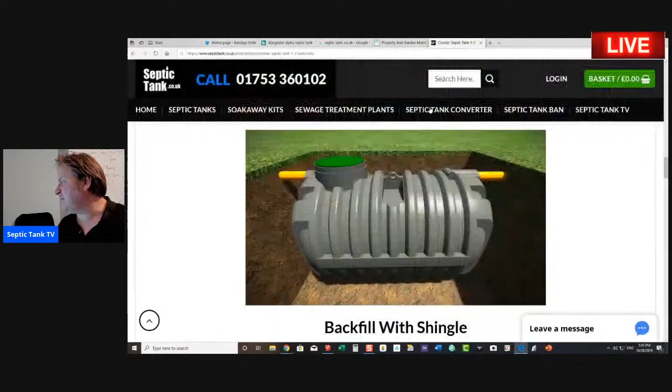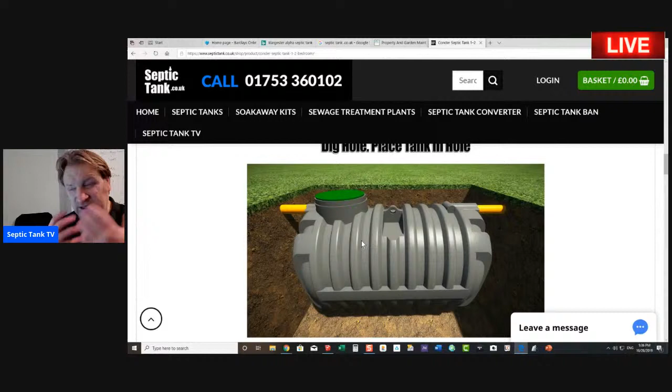Today we're comparing two types of septic tanks: the Klargester onion style or bottle shaped septic tank, and the bullet low profile shape septic tank. We're going to try and work out which is the best, easiest, and cheapest septic tank to install of the two.

Let me get my software up here. I'm going to do a comparison of the two right now. All right, so here we go, if I bring the screen up.

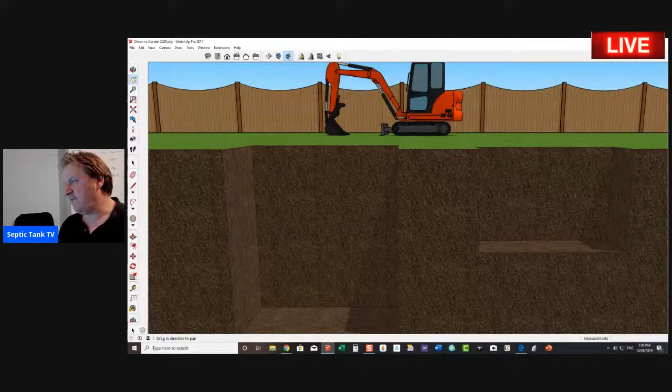What you can see here are two holes. This is a typical garden scenario - we've got a digger, a fence behind, and two holes. Let's put the tanks in their respective holes. In the first hole, we've got the onion Klargester style septic tank, and in the second hole, let's put the bullet shaped septic tank. Those are typically the two types of septic tanks you'll find on the market today.

Let's start with the Klargester style septic tank, starting with cost. Typically it costs about 500 quid to buy a fiberglass onion shaped septic tank. Now it costs about 700 quid to buy a low profile bullet shaped septic tank. So on the surface of things, it seems like with the fiberglass septic tanks, you're getting a good deal.

I mean, look, the pennies make the pounds, don't they? So if you can save a few hundred quid on buying the septic tank, then it's sorted, you've cracked it. No - because you have to take into consideration the total cost of the entire system, the septic tank and the soakaway to install. Or if you're just installing a septic tank, you've got to consider all the bits and bobs needed to install it.

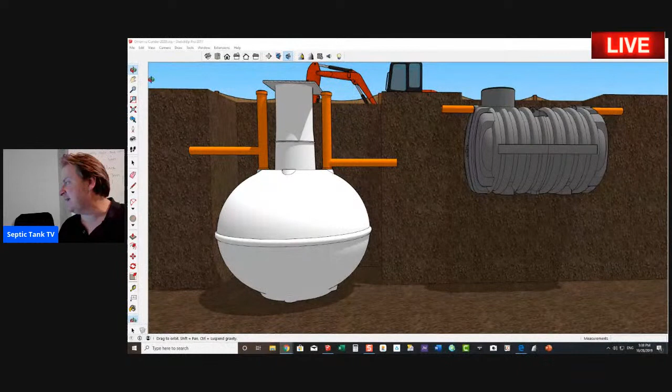So let me give you example number one. You'll notice the onion shaped septic tank's hole is twice the size of the low profile septic tank. So whilst you can get away with a 1.5 ton digger with the low profile bullet shaped septic tanks, you're going to need a minimum of a 3 or 5 ton digger with the onion shaped septic tank. A digger for the low profile tank for the week might cost you about 270 to 300 quid. For the onion shaped septic tank, it's going to cost you 400-500 quid a week - more like 5 or 6, but we'll just say 5. So straight away, the 100 or 200 quid you saved buying the tank has now been lost because you've got to buy a bigger digger.

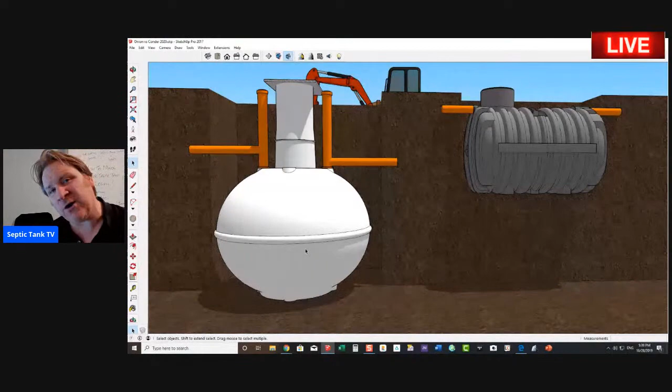So how long does it take to dig the holes for each of the respective septic tanks? Well, to dig the hole for the onion shaped septic tank, you're going down about 11-12 foot, and you're looking at least half a day to dig the hole. Once you start getting past 3 foot and hitting clay or bedrock, you can spend a day or 2 days digging the hole if you're unlucky - I've put in loads of these onion tanks.

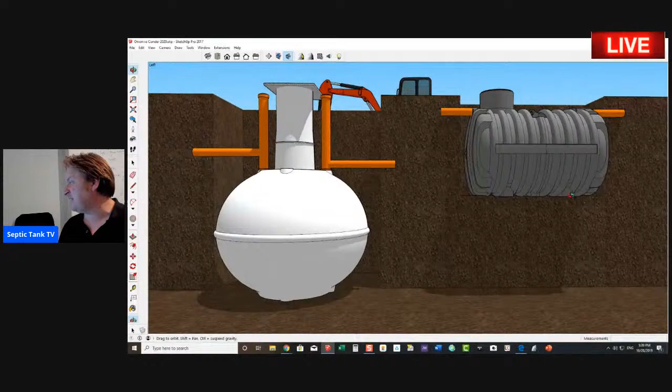With the bullet shaped septic tank, you're looking at about 40 to 50 minutes - an hour at the most, because they're so shallow. You can see the height difference on the two there.

So now, once you've dug the hole, what else do you have to take into consideration regarding the installation materials? Well, with the onion shaped septic tank, you have to concrete them in. But before you can concrete them in, you've got to actually anchor them to the ground - so why?

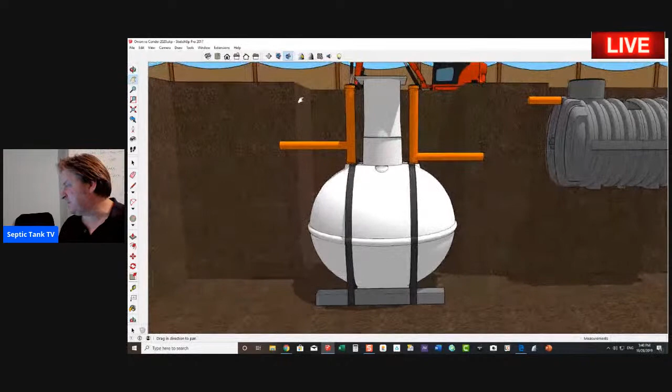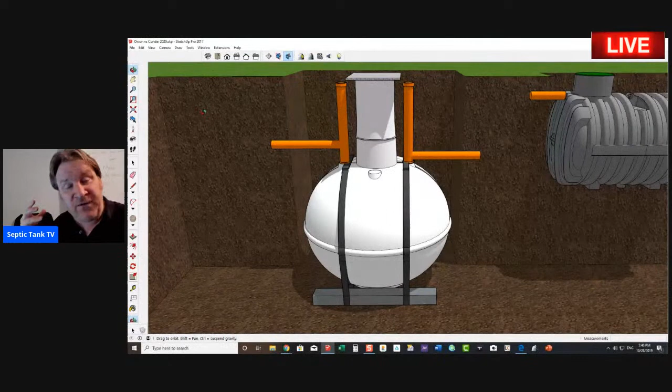Let's say it's taken you a day to dig your hole, and you're now setting it up, getting it ready for the concrete. If it's left overnight and it's not anchored down, many builders over the years have come back and found the onion tank sitting on top of the grass in the morning, because if you've got water retention in the soil, it just pushes the tank right up and it ends up sitting on the ground. So you have to anchor them down.

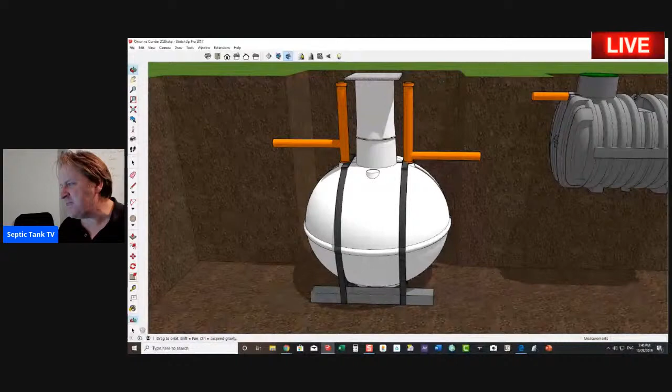You have to also anchor it down ready for the concrete. So the anchor system there is going to cost you about 200-300 quid to get the straps and the concrete lintels. Once you've done that, you've then got to concrete the onion-shaped septic tanks in. Now, if you don't concrete them in, the manufacturers like Klargester will null and void the warranty that comes with the septic tank. You've got to concrete them in, and to concrete them in costs about 600, 700, 800, 900 quid to do.

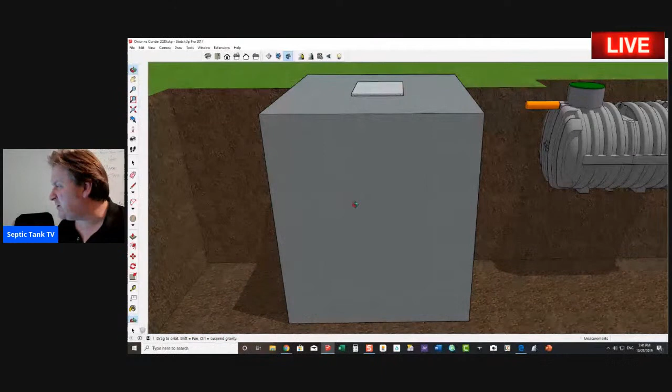So it just gets ludicrous. I've had to concrete loads of tanks in. So let's just break down the costs here. You've bought your onion-shaped septic tank for 500 quid, let's say you got it cheap at the builder's merchants. 500 quid, right?

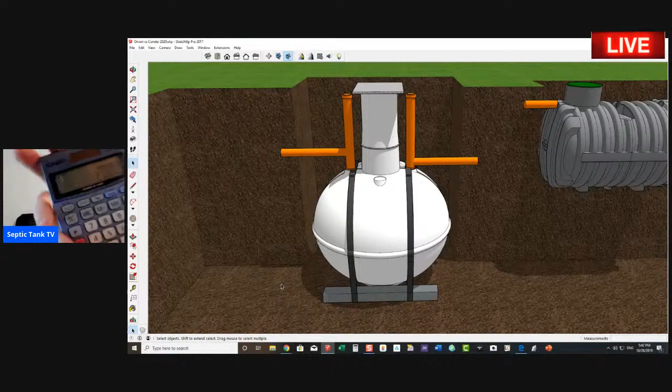Let me get my calculator and work this out. So you got 500 quid for the septic tank. You've then paid 500 quid for the digger. 500 plus 500. The lintels and the straps and the anchor system there has cost you 300 quid. And then you've got to fork out 600, 700, 800 quid in concrete costs. Let's say 700 quid. So far the costings are £2,000.

This is what I'm saying. Don't be taken in just because you've seen a cheap fiberglass onion tank on eBay for 300 quid or at the builder's merchants, because you've got another 1,300 quid, 1,700 quid to pay on top of that. You've got 700 quid in concrete. So suddenly you've paid 1,000 quid out. Then you've got to get a bigger digger. Then you've got to anchor it in.

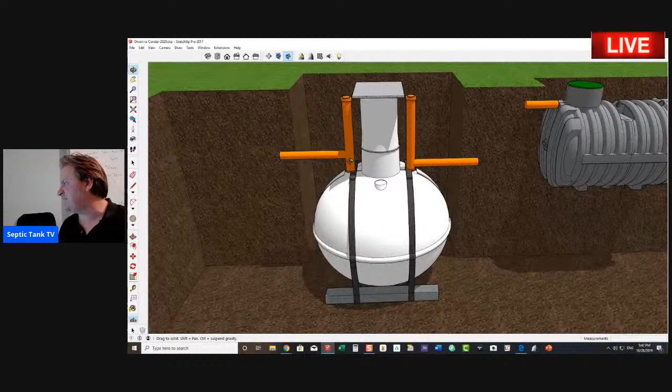You need to weigh up the pros and the cons. Don't be conned by just seeing a cheap onion tank. They're not giving it away for nothing. People don't want them, people don't use them anymore. But look, I'm just telling you how it is. I'm not demonizing onion style septic tanks. To be honest, they were popular in the late 80s, early 90s, but they've been superseded by these low profile septic tanks.

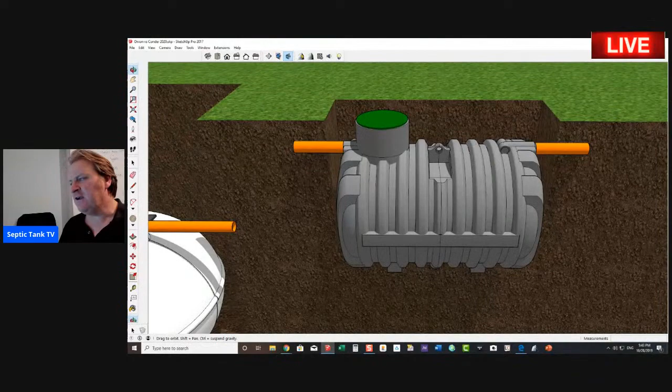So let's have a costing of the same. It's taken you an hour to dig the hole for the low profile bullet shaped septic tank. I use these bullet tanks, they're fantastic. So it takes you an hour to dig the hole. Then you just need 4 to 5 ton of shingle, and you literally backfill around the tank up to 3/4 in height of it. The beauty with this is, you could do that in half an hour, but let's say it takes you an hour to backfill it.

So it's going to cost you about 200 quid to do that and then cover it into topsoil. So let's work this out. Let's say it's cost you 700 quid for the low profile, no-concrete-in one. They do different versions, you can actually buy the weaker versions where you have to concrete them in, but it's not worth it. It's worth paying the extra couple of hundred quid to get the non-concreting versions. So let's just add this up.

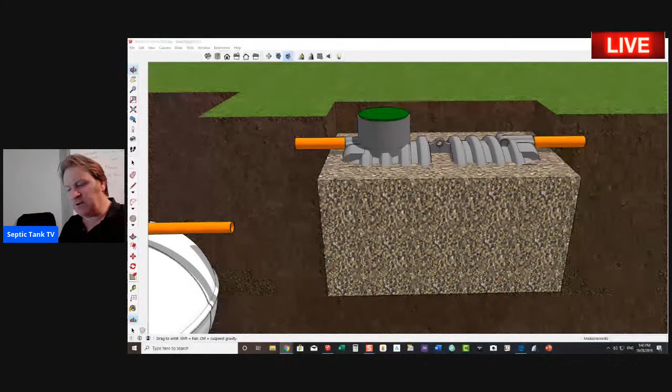So we've got 700 quid for the low profile tank. We've got 200, let's say 300 quid for the shingle. 1,000 quid all right - so it's half, not only, is it half the price of what a bottle-shaped onion tank takes in materials to install it.

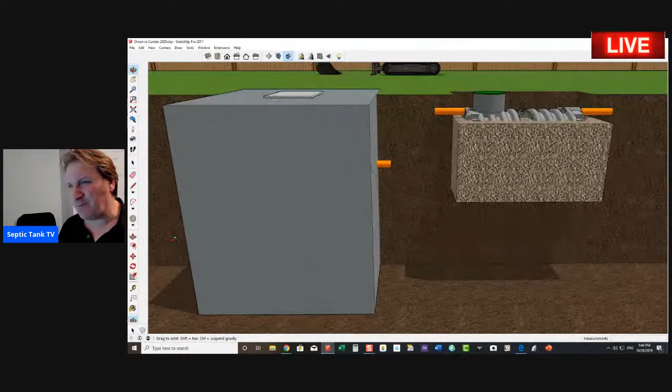It also takes 2 hours compared to 2 to 3 days to install the septic tank. And we haven't even talked about putting the soak away in yet. Oh man, on these onion tanks, flaming hell.

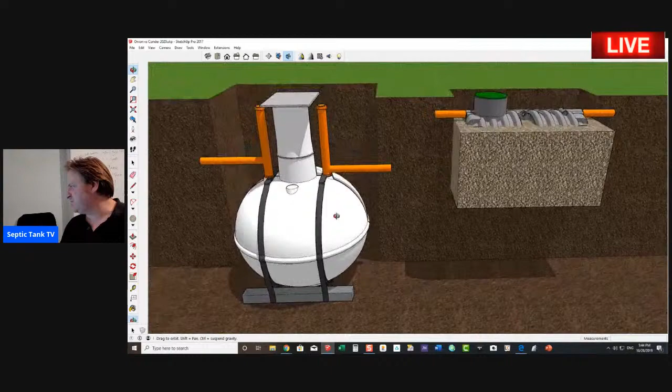I mean look, you compare this, right? Let me take the onion. So on the onion tanks, let me just take the digger off from the background there. There we go - so on the onion-shaped septic tanks, you can see the depth of the outlet pipe here. Obviously the deeper you go when installing a septic tank, the harder it is, the more resistance your soak away will meet, so it won't be able to soak away as freely as, say, a soak away pipe that is nearer the grass.

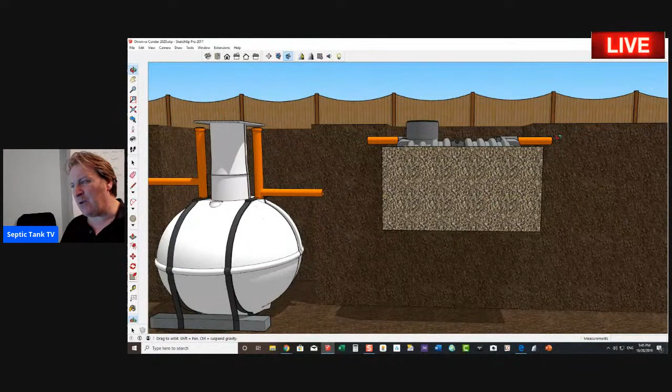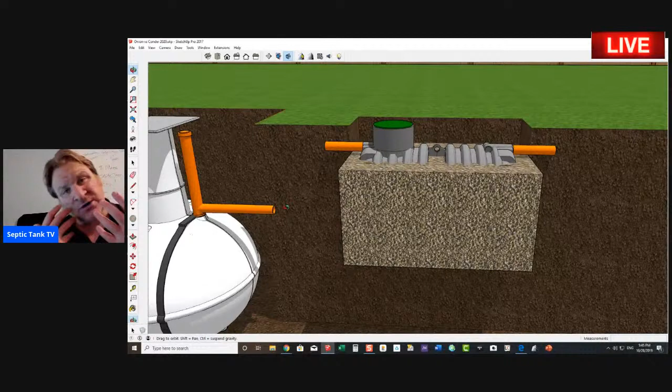So you can see the difference in height of the soak away. Here's the soak away outlet pipe for the bullet-shaped septic tank, and here's the outlet for the onion-shaped septic tank. So you can guarantee that the soak away for the onion tank is going to cost you 2 to 3 times more in money and time to install.

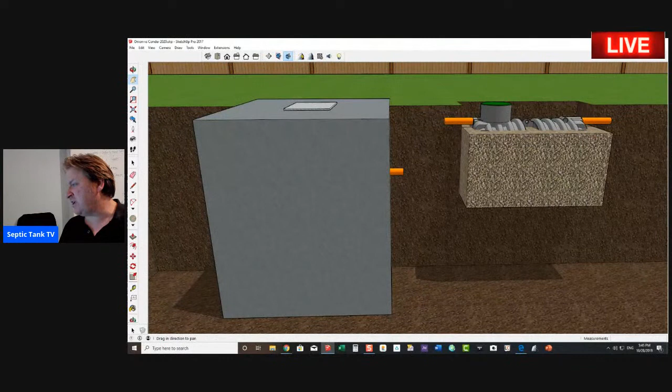So there you go, that's a quick comparison of the onion-shaped septic tank, Klargester style septic tank, versus the low-profile bullet-shaped septic tank. So for me, and I'm just talking personally now, it's a no-brainer to go for the low-profile bullet-shaped septic tanks here, because they are...

Basically, in the late 80s, early 90s, these were the only septic tanks you could get - the onion-shaped, bottle-shaped septic tanks. They were fantastic when they came out compared to the big, heavy concrete septic tanks you had to install, like nuclear bunkers. When these fiberglass tanks came out, they were amazing. But technology has moved on, and this is the scientific breakthrough beyond what those onion tanks were in the 80s. Now you've got a tank that's bigger in volume, half the height to install, and doesn't need any concreting. For me, these low profile tanks win hands down every time.

Or, as I said, you can just go for a low profile tank that doesn't need to be anchored down and is really easy to install. But there you go, the choice is yours.

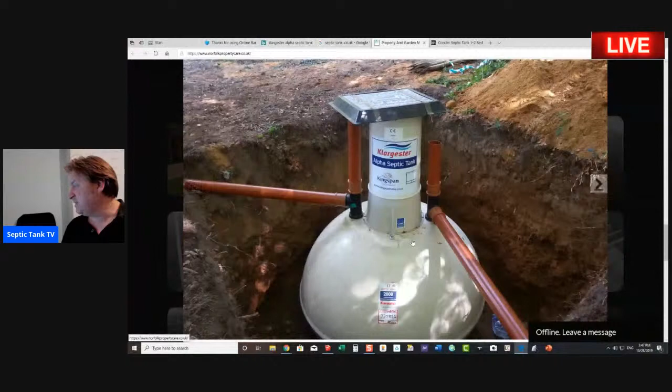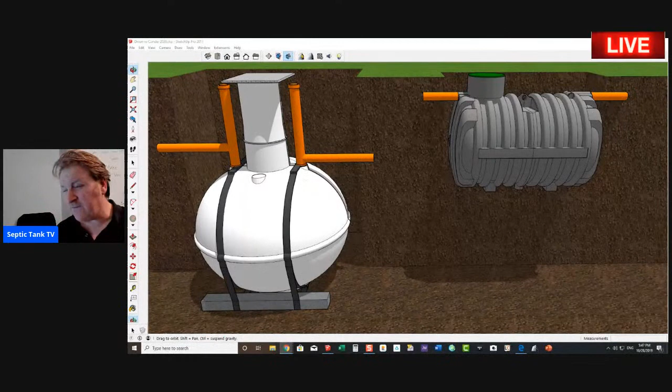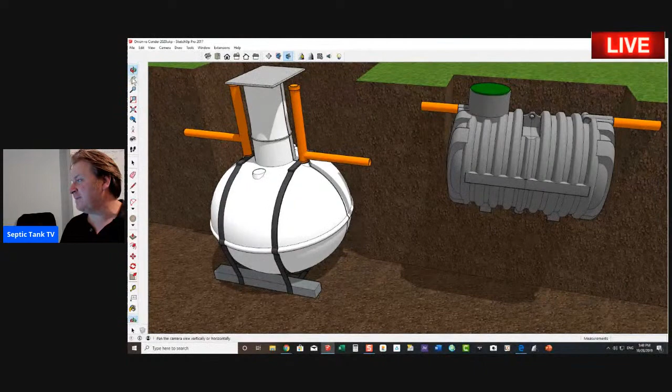That's the whole reason why I do these live broadcasts, is to just advise you, basically. So obviously you decide what you want to do. If you want to go for an onion tank and take out a week to install it - some people like doing that - and you want to concrete it all in, blah blah blah, then go ahead and be my guest. If you're an installer looking for a job with very few complications, and you'd like to save money, not get any repercussions or complications, and not have to concrete things down, or maybe you're putting it in yourself and want a tank that's easy to install, or you can just get your builder to do it - then I'd heartily recommend going for the low profile septic tank there. So there you go.